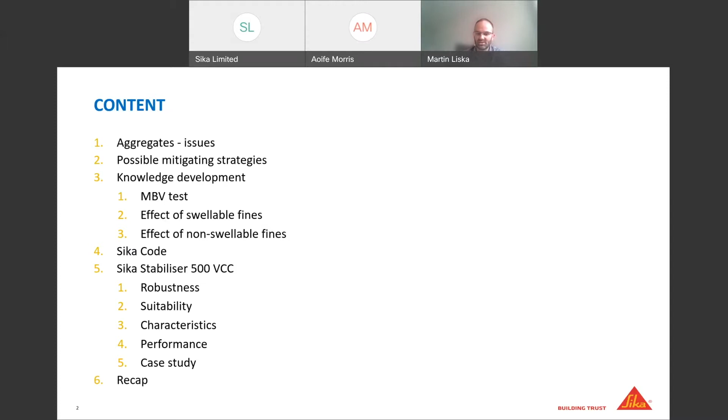So, going into the problem straight away, aggregates. You probably heard that aggregates is the second most consumed raw material in the world. And if you guess which one is the first, it will be water, unsurprisingly. Aggregates are under such demand because of urbanization as a main driver of the usage of aggregates.

50 billion tons of aggregates are used annually. Looking at urbanization trends, in the 1950s around 30% of population lived in urban areas. Now it's over 55%, and by mid-century the number is going to push 70%. Bearing in mind the population in absolute numbers is growing as well, the demand on aggregates will continue to rise. Also, the quality of aggregates is of great importance, and because of extensive usage, we're slowly running out of good sources.

The UK is not different. The pressure exists in this country as well. Replenishment is currently lagging behind the demand and extraction, and quality concerns are increasingly more common for numerous reasons.

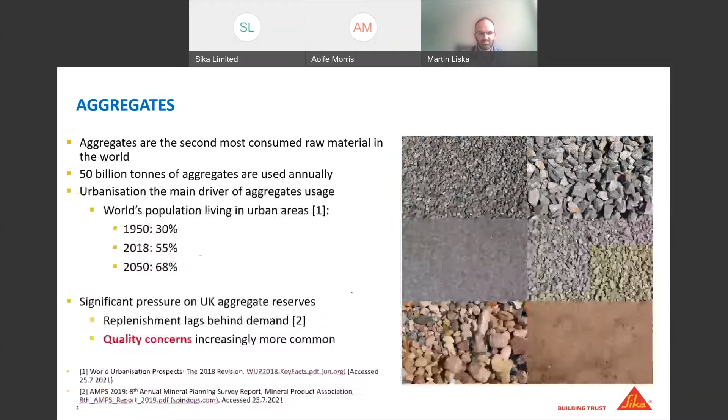Looking at the issues that can arise with aggregates, I think contamination is the primary example. Why that is, I would say, is in a number of cases insufficient washing facilities, and in some cases it's technically or practically very difficult to do so.

In the right picture, you can see an example of 20 mil aggregate from one of the UK quarries. I'm not going to say which exactly, but that's essentially what, on occasion, we need to deal with. And that's not the worst, to be honest, that is used in concrete production.

So in terms of the contamination itself, what is the problem? Well, the contamination is caused by the presence of minerals of very small particle size, usually of very high surface area, sometimes with surface charge. They can be swelling or non-swelling, and have all other performance characteristics, but can be quite variable in terms of content and also makeup. This is really important, I'll mention that later on in the presentation.

If we use contaminated aggregates in concrete manufacturing, obviously there will be consequences. The most common and obvious one is workability fluctuation, also a lot of loss of strength, and also durability issues.

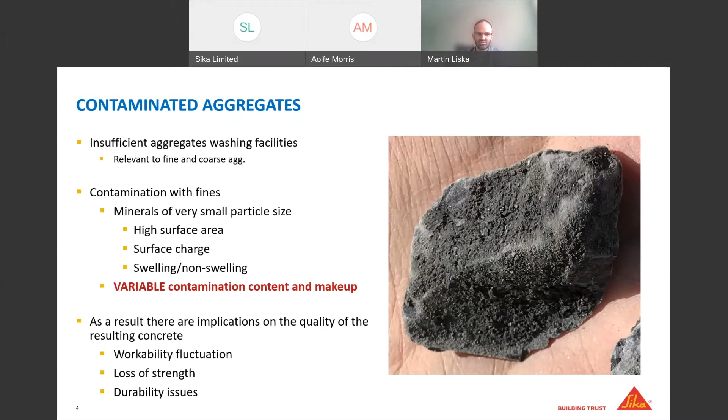So what can be done, or what do we do currently when we deal with problematic aggregates which we just can't simply wash and bring them to the state where they should be? Well, sometimes we can increase the cement content. That approach will certainly work, however there will be cost and also sustainability implications. Particularly with sustainability being very high on everybody's agenda, this makes the solution quite unattractive, so it's not really an option.

We can also increase the super plasticizer content. Again, there will be cost implications and also stability issues if that's the approach that is chosen.

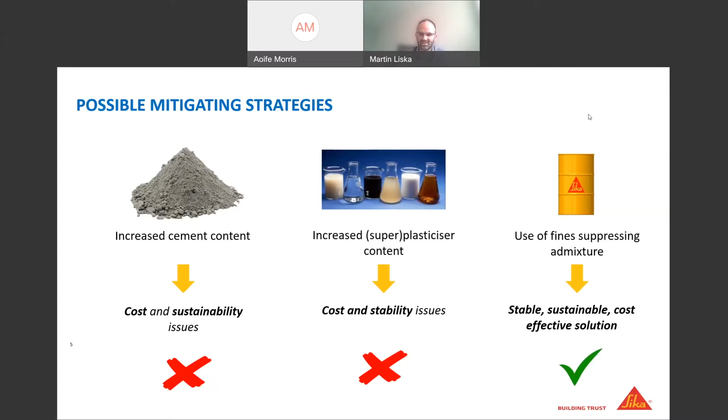The third major option can be the use of specialized admixture that will negate the presence of this fine contamination, and Sika Stabiliser 500 VCC is one of these materials. That will result in stable concrete, a sustainable solution, because we've got options to reduce cement content in some cases, and it will also be cost effective because part of the admixture will replace the existing plasticizer or super plasticizer. So there is a potential for net positive financial effect.

Now, I mentioned already Sika Stabiliser 500 VCC being the solution that Sika is offering. Why do we think it's one of the best solutions in the market? It's because of its robustness, and like I mentioned, I will comment on the robustness more later on in the presentation, what it actually means and how we measure that.

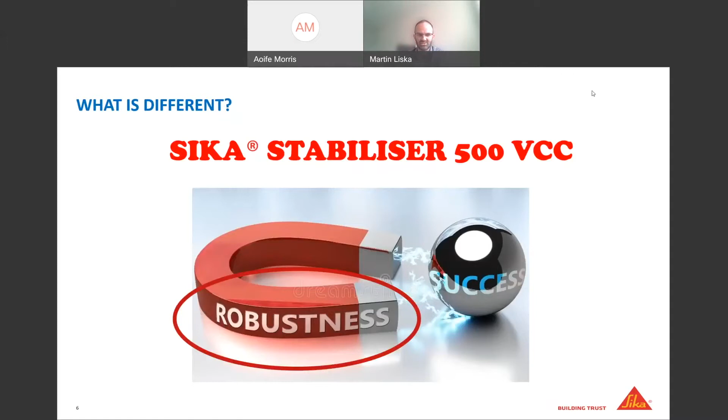Before I get to that, I would like to share the journey of the knowledge development. There have been significant resources dedicated by Sika centrally, by our colleagues in Zurich, who studied the contamination matter at fundamental levels, also practically in terms of concrete technology. Obviously, I don't have time to present all findings, but there will be some conclusions shown in the following slides.

Looking at detection, very often when we talk about problems with contamination of aggregates, we're mostly referring to swellable fines, to clays. For that, there is a method, MBV, methylene blue value test, according to EN 933. That test, detecting only swellable contamination, is not really robust enough to detect all problematic scenarios.

In the graph, you can see 10 different sands analyzed for flow in mortar, but also analyzed for the MBV test. Particularly in the examples highlighted by the red arrows, the correlation is not always there. For instance, mortar C shows high flow, so you would expect low MBV value. Similarly, for mortar H or sand H, you see very low MBV value, but the flow is not as high as one would expect. So there is no clear correlation between every scenario that will cause problems within aggregates.

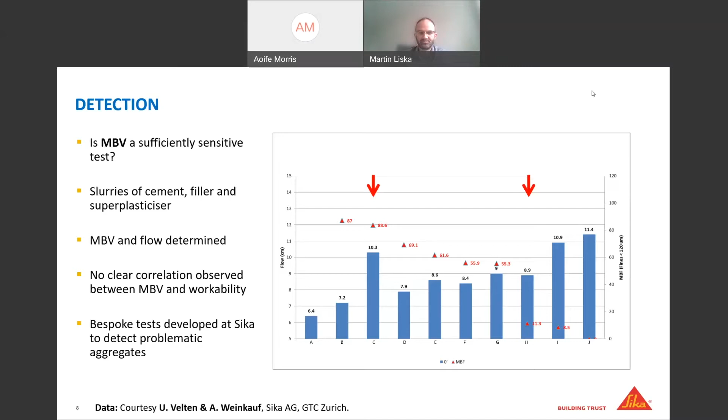Testing of the issues was the first thing, then finding out the issues of the problem was the next step. So our colleagues in Switzerland looked at potential effects, but also the composition of the various contaminants. In terms of the effects, there could be those affecting workability in terms of water absorption, such as surface wetting, interparticle hydration, delamination, capillary suction.

Low workability due to PC adsorption by the contamination. Intercalation, that's mainly within the sheets of swellable material. Surface adsorption, delamination as well. And then grading-caused low workability, so bad grading, excess fines or lack of fines. Also durability issues caused by the presence of various harmful substances.

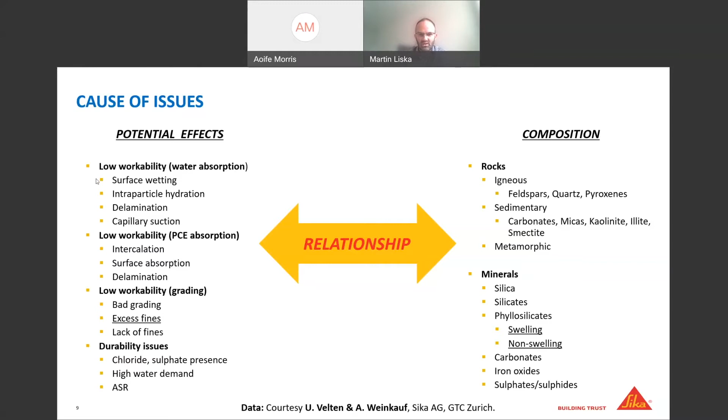So let's now focus on the effect of the swelling and non-swelling. Like I mentioned, the attention is placed on the swelling clays. Obviously, the effect exists on the non-swelling material as well. So firstly, effect of swellable fines. You see mortars tested with variable levels of bentonite, which is a swellable material.

It's a model scenario where sand was contaminated deliberately with various levels of bentonite. You can see that the flow table test, as well as the setting time, is dropping quite rapidly with the increasing content of bentonite. So quite a strong effect on flow and setting time by the contamination presence. Again, that is probably not surprising.

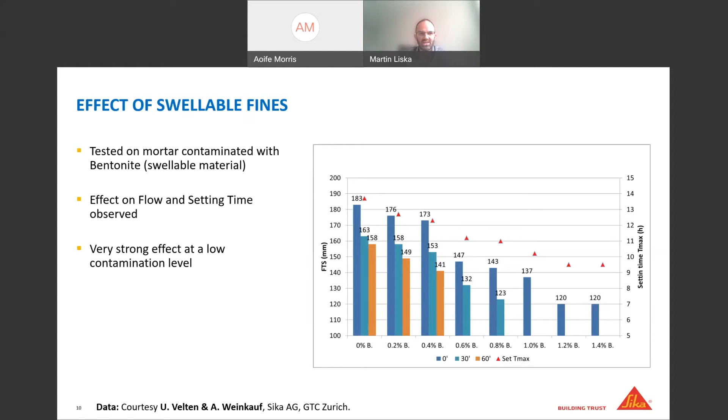Now, looking at non-swellable fines, in this case, the same sand was contaminated with kaolinite instead of bentonite at a bit higher level, but the effect, although not so strong, is also quite significant from a technological point of view. So it's quite clear that we can have a mixture of contamination. Not all will be swellable, but even the non-swellable or range of other materials that are not swellable will also cause quite a lot of problems.

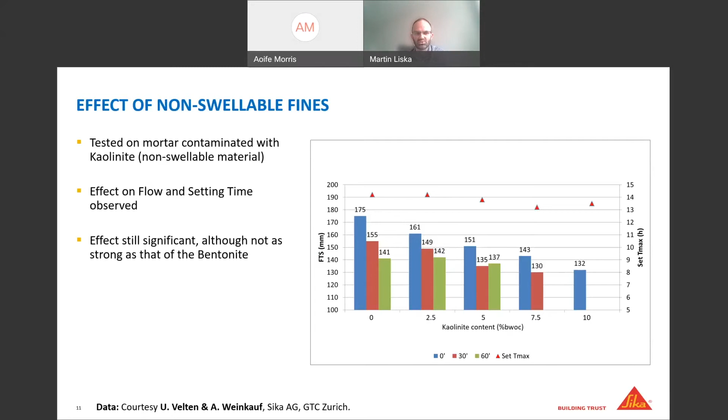So all the knowledge that was generated both in the UK and centrally has been encapsulated into the system called Sika Code. Information about the system is available online. If you search for challenging aggregates within the Sika system, you will find sufficient or relevant information. It offers an approach to solving problems with problematic aggregates, starting with identifying what the problem is.

Looking at the analysis of the raw materials, finding out what the actual problem is. I mentioned that bespoke Sika testing exists, which we are prepared to deploy to appropriate cases, and then we will design a solution.

The system is particularly suitable for very complex and challenging scenarios where a standard concrete technology approach will not be enough. Based on this knowledge, this Sika Stabilizer-500 VCC was developed as well.

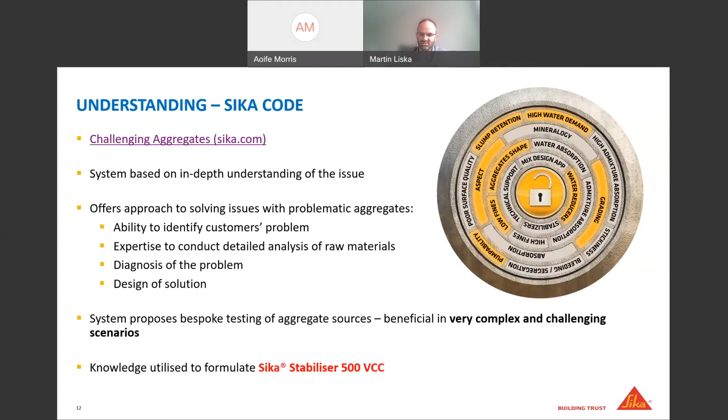So what is the specific solution? Obviously mentioned a few times, that's what the webinar is about. Sika Stabilizer-500 VCC is an admixture suppressing the negative effects of fine mineral contamination. This fine suppressant is not recognized by any particular standard, but it would classify as a plasticizer according to BS EN 934 part 2.

I'll show it's the best performing system in the market. It addresses sustainability by making problematic raw materials useful again. Those which couldn't be used in concrete mixes can now be used with confidence.

Obviously, we're achieving cost savings through primarily reduction of issues with concrete performance, decrease in rejected materials, decrease in transport, decrease of the need to handle rejected materials, but also through savings in cement content that does not need to be put on top of the concrete composition in some cases.

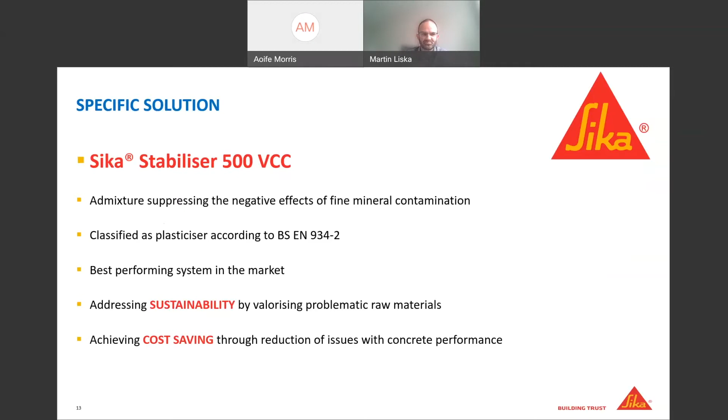So I mentioned robustness a number of times already, and now I'll say a few words about it. It's not really as much of a problem to have contamination within aggregates because, like I mentioned, one can design or cater for that in the mix design by adjusting the proportions of the various raw materials to get the fresh properties as intended.

However, the biggest problem is the variability of the contamination speciation, but also variability of the contamination content. So if you fix your mix design to a certain slump value, and then the next load of aggregates is problematic, what's going to happen? Your workability will be negatively affected again and again as more and more different batches of raw materials are delivered to the plant.

So with that in mind, the solution of Stabilizer-500 VCC was developed to ensure that as this content of contamination fluctuates, the workability of the fresh concrete stays as stable as possible. And that's where the robustness is coming from, and that's what I'm going to demonstrate in the upcoming slides.

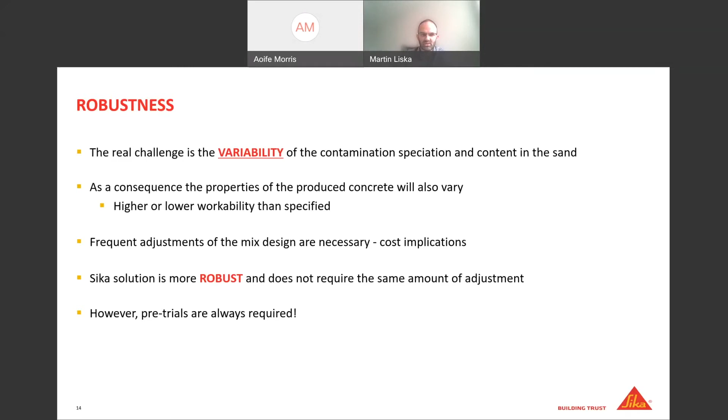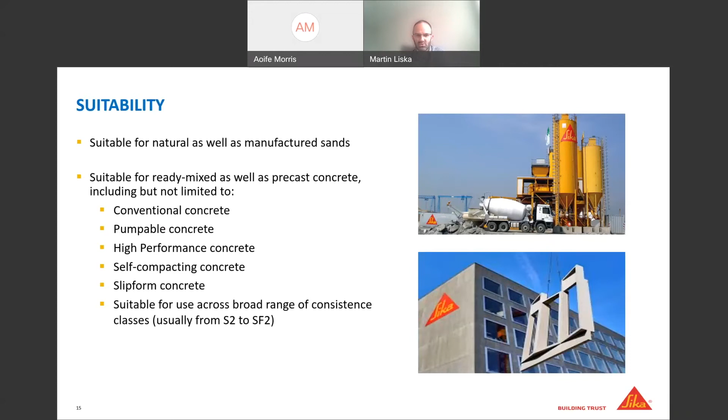In terms of suitability of the admixture, it's suitable for natural as well as manufactured sands. It's suitable for ready-mix concrete as well as precast concrete, and some applications not limited to conventional concrete, with pumpable concrete, high performance, self-compacting, slip form, and it's suitable for a broad range of consistency classes, ranging from slump 2 to slump flow 2.

Now looking at some of the performance characteristics: improved rheology and improved cohesion properties. Obviously, there is potential to reduce cement content in problematic packages. There is also potential to utilize secondary aggregate sources, again which will be very important going forward as the natural resources of aggregates are being depleted. Improvement of durability, reduction of segregation and bleeding, and also potential to reduce the mix cost.

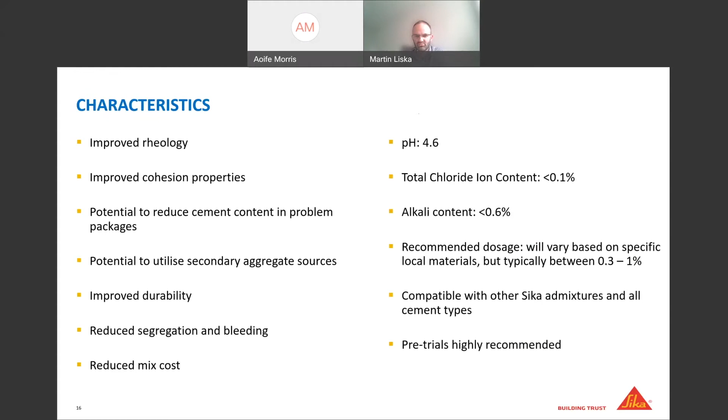Some further characteristics: pH 4.6, total chloride less than 0.1%, alkali content less than 0.6%, and the recommended dosage will vary from case to case, but typically between 0.3 to 1%. The admixture is compatible with all other Sika admixtures and also with all cement types. And again, pre-trials are definitely highly recommended.

So I mentioned robustness. Now let's demonstrate what robustness means in practice. Firstly, on non-swelling fines: let's imagine we've got aggregates or concrete with 5% of non-swelling fines that would be causing us problems. So we fix our mix design to that 5% as the middle point that you see.

Now, the contamination will move up and down, and if it does, there will be an implication on the workability. So ideally, we would like to be on the 100% dashed line—that's our target slump value. If we go above, obviously the slump is higher. If we go below, the slump is less.

So if we look at the control, which is the sort of red/orange line, when the contamination decreases, the slump increases, and vice versa. When the contamination increases, the slump is negatively affected as well. So quite a lot of variation.

Now, we tested also one of our competitors' products, which improved the situation. That's the gray line. That is closer to the 100%, but Stabilizer-500 VCC is much closer, is the most robust solution. And in the proximity of the 5%, let's say from 4 to 6, the variation is really minimal.

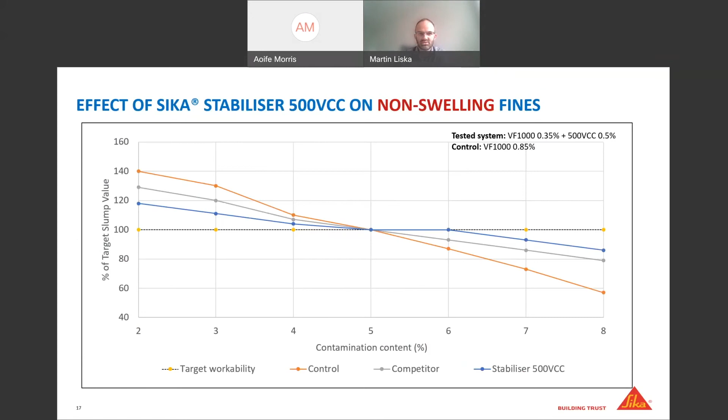Now, looking at a similar situation for the swelling fines, obviously the content of the swellable fines is much smaller, because like we mentioned before, the effect of swelling fines is much stronger. In this case, the scenario was fixed at 2%, and again, as we go either down or up, the workability either increases or decreases. For the control, in the most significant way, somewhat less for a competitor's product, and the least for Stabilizer-500 VCC. So that is the demonstration of the robustness of the system.

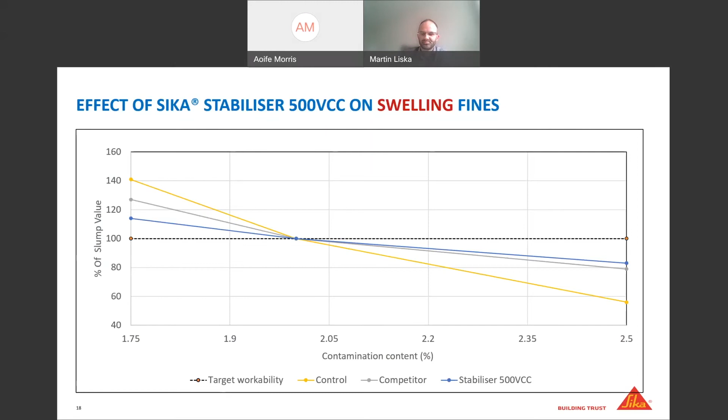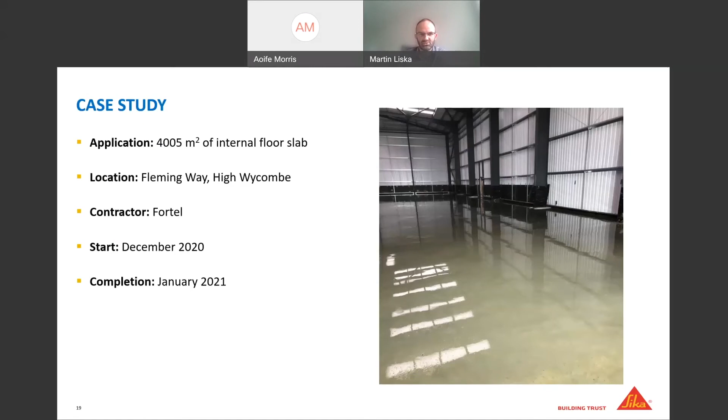The conditions were challenging. Not only contaminated aggregates were used of variable level and type, but also it was concreted at low temperatures, obviously between December and January. So it wasn't an entirely easy scenario. Using any other mitigation strategy wasn't really on the cards because of cost and obviously sustainability issues. But with the Sika Stabilizer-500 VCC, the result was really excellent, and that was a statement from the client, essentially really praising the product for very good performance, as is shown in the slide.

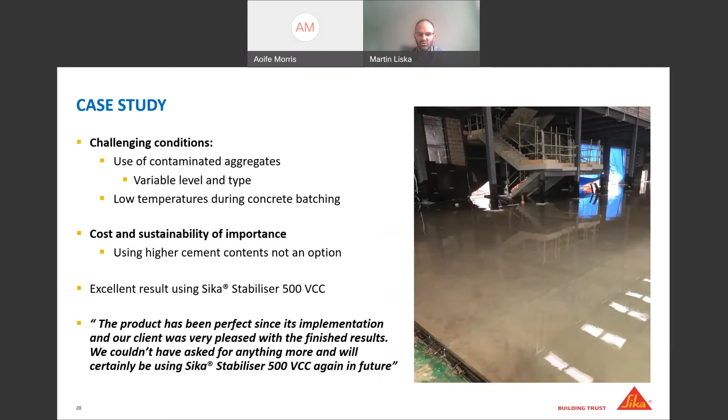So to conclude the initial part of this webinar, the contamination obviously can vary. It's not only swellable clays. It can be a massive amount of minerals that also can cause problems. So we need to concentrate broadly on the issue. And that's what we have done at Sika. Bespoke admixture negating the effect is the ideal solution, and the Sika Stabilizer-500 VCC offers the best performance.

In terms of the unique selling points, the Sika Stabilizer-500 VCC is the most robust solution on the market, and is based on a massive amount of investigation that was done in numerous countries. Obviously, significant impact in terms of sustainability, efficiency, and also cost savings that demonstrably can be achieved. And like I mentioned, if you're interested to use this admixture, pre-trials are always recommended.